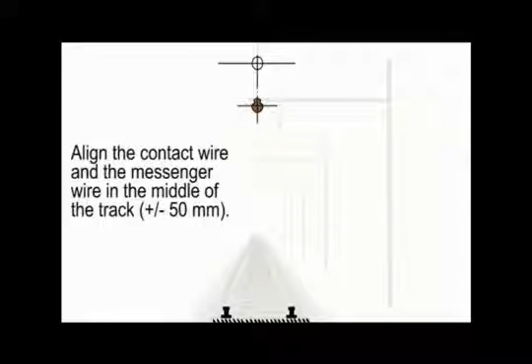First is preparation of contact and messenger wire. We have to ensure that there is no stagger on the contact wire, and the maximum stagger permissible is plus minus 50 mm. We also have to ensure that there is no twisting on the contact line.

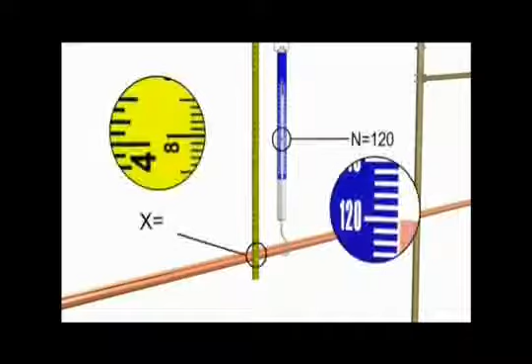Hogging instructions: hogging can be determined by taking the average of two masts A and B, and X that we have to determine. To get that hogging height, go to the middle of the span, and with the help of a spring balance, raise the contact wire by 120 Newton or 12 kg.

Now the contact wire which is raised up can be measured with the help of a scale, and thus we can see how much hogging has to be kept for the neutral section.

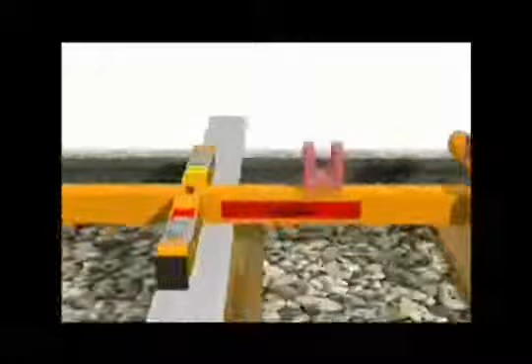Now comes the alignment of the adjustment jig. Place the jig across the track on a flat plate as shown in this picture. You can see this red direction.

Now adjust this spirit level so that it comes to the center. Ensure that you are standing in the same direction, and now rotate this jig by 180 degrees, and again adjust the spirit level so that it comes to the center. With this, we ensure that the level of the track has been stored in this jig.

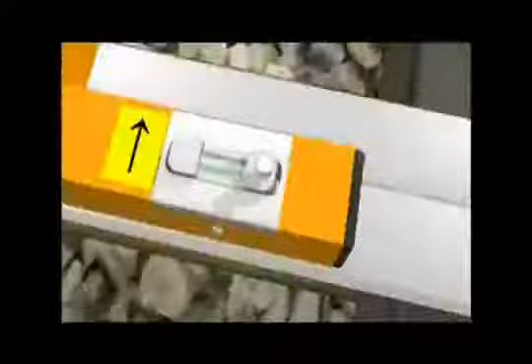Now we'll see the installation of messenger wire insulator. First, with the help of a Tirfor or a pull lift, take the load of the catenary wire.

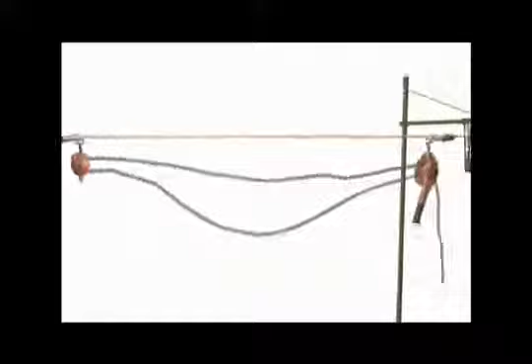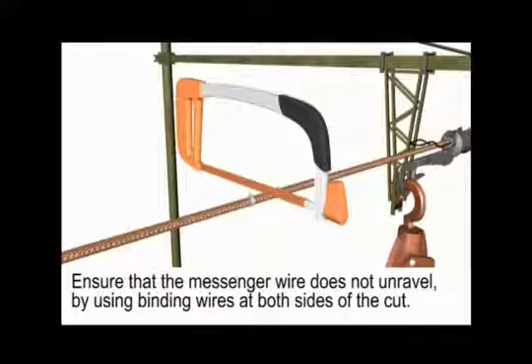Now after marking on the wire with the help of a binding wire, cut this wire very smoothly with the help of a hacksaw blade.

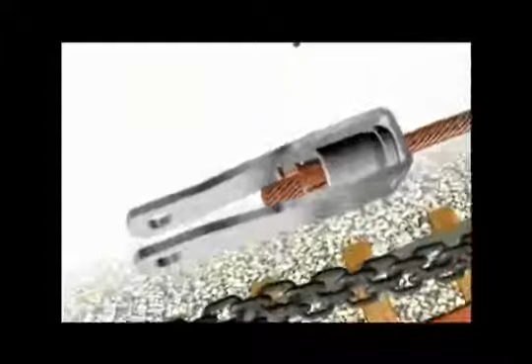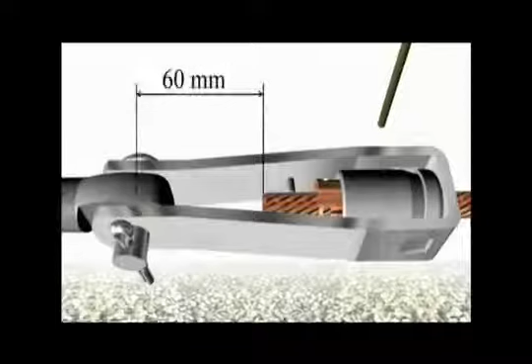Now file this wire so that there are no stranded wires on it. Now insert the 4-collar socket and ensure that the distance between the end wire and the center of the pin is not more than 60 mm, as you can see in this picture.

Now we will see the installation of the phase break body on the contact wire. First we will see that there is no kink on the contact wire where this neutral section has to be installed. Now place this whole neutral section body on the contact wire and fix the splice.

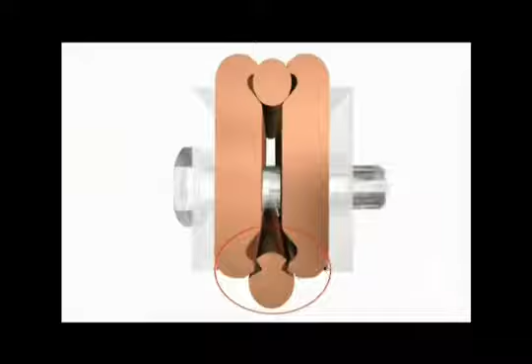Fix the splice so that it comes on the full grip of the contact wire, as you can see in this picture. Now after doing this, we tighten all the screws. Now this shows that we have to ensure that this wire clamp should come to the full length.

Now tighten all the screws with the help of a torque wrench, and it has to be tightened with 50 Newton meter.

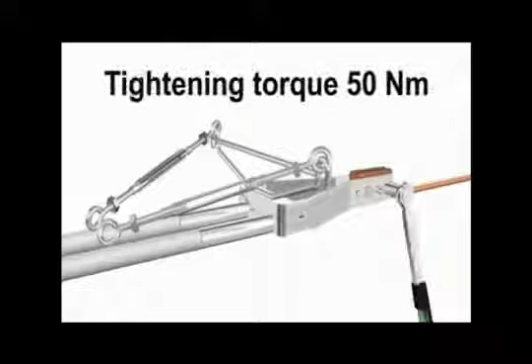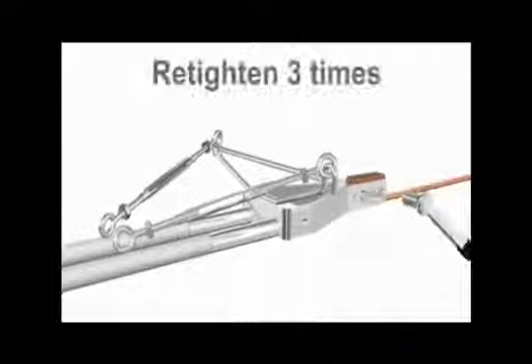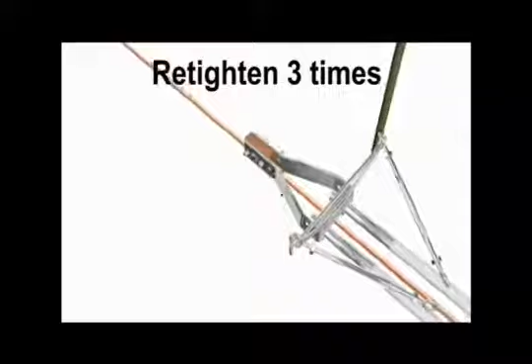All the screws, since this is a new installation and it is being installed for the first time, all the screws and nuts have to be retightened 3 times, so that this being new copper, the grip of the splice comes into good contact with the contact wire.

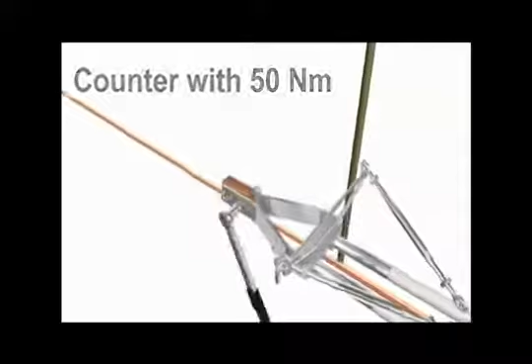Now similarly use the counter nut again with the 50 Newton meter force with the help of a torque wrench.

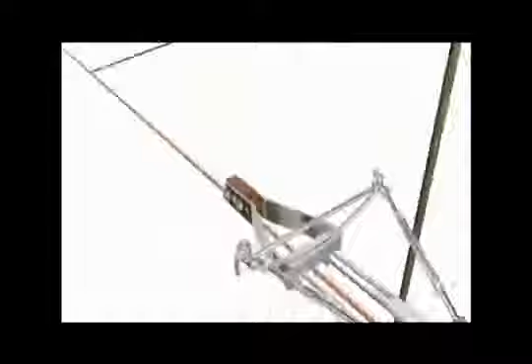Now fix all the screws, and this has to be done on both sides. Now cut this contact wire with the help of a cutter.

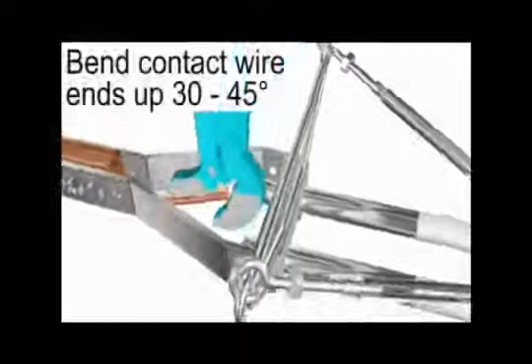And now the extra wire which is coming inside has to be bent with the help of a wrench by 30 to 45 degrees, and this has to be done on both sides.

Now note this installation direction. Now what we are doing is specifying the hogging level which we had measured earlier, and we have to raise our whole neutral section body X height extra than the actual height of the contact wire.

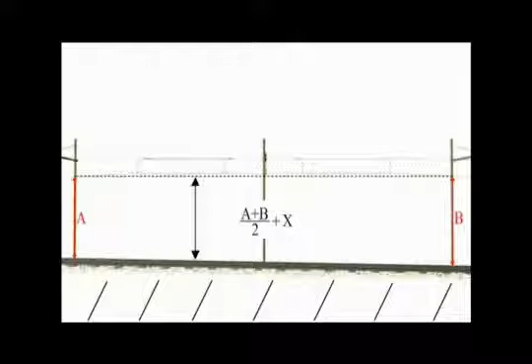Now we can do this first with the help of the droppers to get that desired hogging level. So first, with these 4 droppers, we will adjust the hogging and fix the screws.

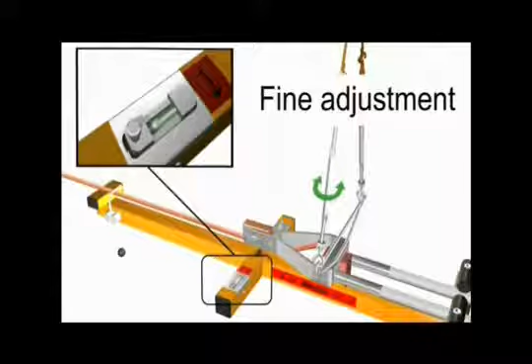Now we will take out this jig and adjust this turnbuckle so that this level comes to the center, ensuring that our neutral section is coming in parallel to the track.

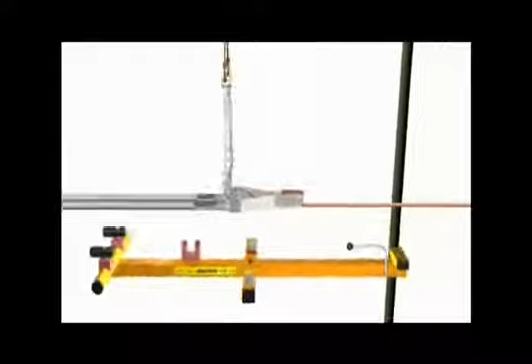Now we will go to the other element. You can see that this direction has changed from red to yellow, and again with the help of this turnbuckle we will adjust so that this level comes to the center, ensuring that we are leveling our neutral section body with the track.

Now we will mount the runners. Put the runners on top of this installation jig, and now tighten these screws and ensure that this has come with the full grip of the contact wire.

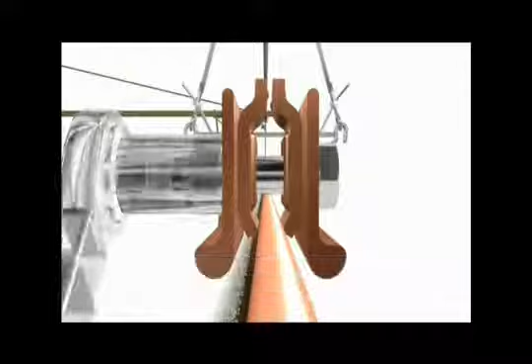Now tighten all the screws with a torque wrench with 50 Newton meter, and again the counter should also be tightened with 50 Newton meter.

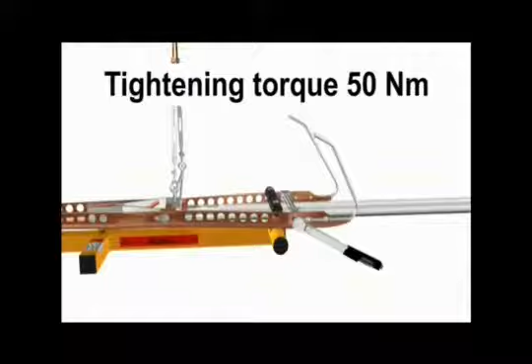All the screws should again be tightened with 50 Newton meter on the runners, and then in the end the strengthening rod should also be tightened with 50 Newton meter. The counter should also be tightened.

Now similarly we will do the same on the other side of the section of the element. Tighten all the screws again with 50 Newton meter, and ensure that all the counter nuts have been tightened.

Now similarly we will repeat the things which we have done on the other side also. After this we will check how this neutral section has been installed by gliding our spirit level across it, so that we can fine tune if something is not perfect.

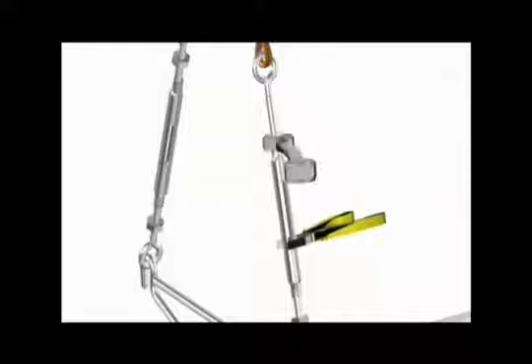Now we will fix all the counter nuts of the turnbuckle so that this doesn't come loose because of the vibration, and we should secure it with the help of a wire also.

This is a very important safety feature which has to be taken care of.

Again cut the extra wire, and similarly lock the nuts also of these droppers.

Now again check the alignment with the help of a Panto, and now we can see here there are two OK, green one is OK, which shows that it should be very perfect. Maintenance guidelines for Arthur Flury phase break NS25.

First we will see the maintenance of isolators or insulators.

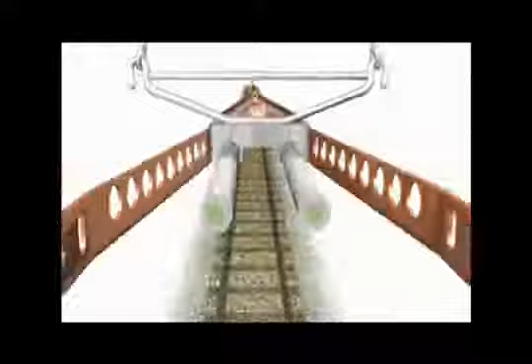You can see that with the passage of pantographs, the insulator rods will be worn out, and once this wear is 13 mm and 2 mm of the diameter, it means that we have to rotate it once.

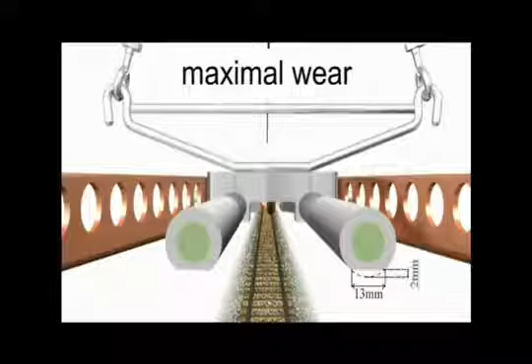With the help of a wrench we have to rotate both the rods simultaneously and on both sides also.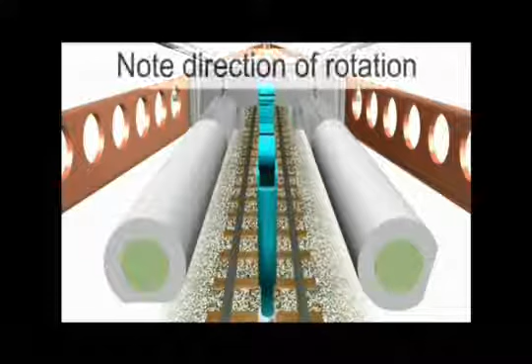As you can see here that we are rotating on both sides, and you have to note the direction that the rod has to be rotated inside. Both rods have to be rotated inside, and you have to note the direction.

So you have seen that we have moved one point, and with again the passage of pantographs, these rods will be worn out, and similarly we can rotate this rod 5 times.

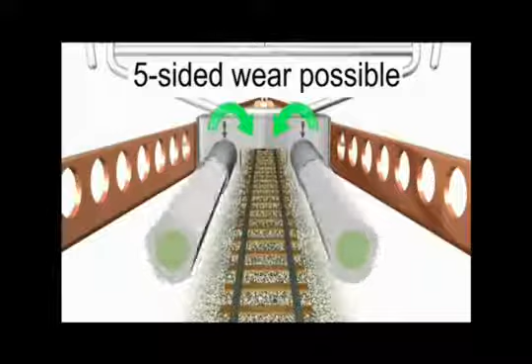So you can see that direction, we are always rotating the rod from the inside, and once we have done this, we have to replace this rod with a new one.

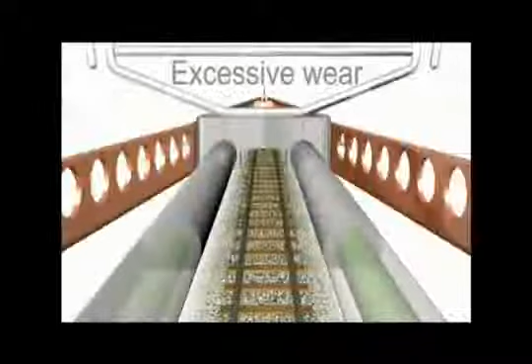So we have to ensure that it doesn't get worn out so that this fiber is exposed. In that case also, we have to replace this rod.

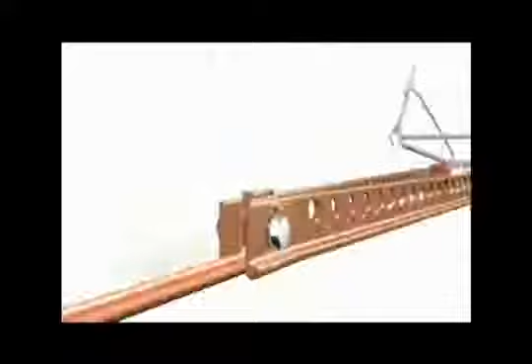Now maintenance of runners or skids. Again here you can see this is a profile of a new runner, and with the passage of pantographs this will be worn out after some time, and once that thickness becomes 2 mm or 1 mm, then it means it has to be replaced.

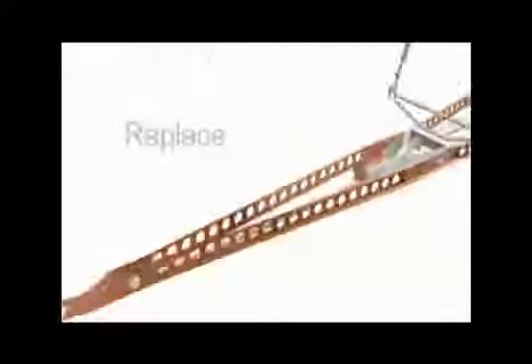And for replacing, we have to remove the old skids and then place the installation jig, and then again put this new runner and tighten it.